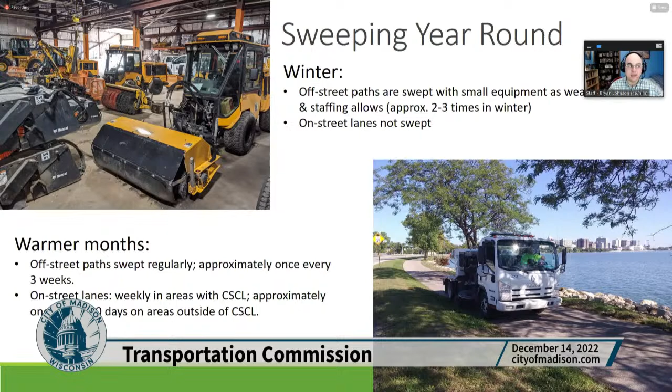During the winter months, off-street paths are swept with that small machine, but the on-street paths we are unable to sweep. The bigger street sweepers can't operate in the winter, so we don't use those. Obviously we can't use them. Plus they're also shipped out for yearly maintenance overhaul in the winter months, so we don't even really have them on hand to take care of any on-street bike lanes.

During the warmer months, the off-street paths are swept regularly, once every 3 weeks or so, with the equipment shown in the photo. The on-street lanes are swept fairly regularly as well. In the Clear Streets, Clean Lakes area, which is the downtown core isthmus area, any on-street paths there, like bike boulevards, are swept weekly. Outside of that area, every 10 days or so, give or take, depending on equipment availability, breakdowns, and things like that. But they're swept really regularly.

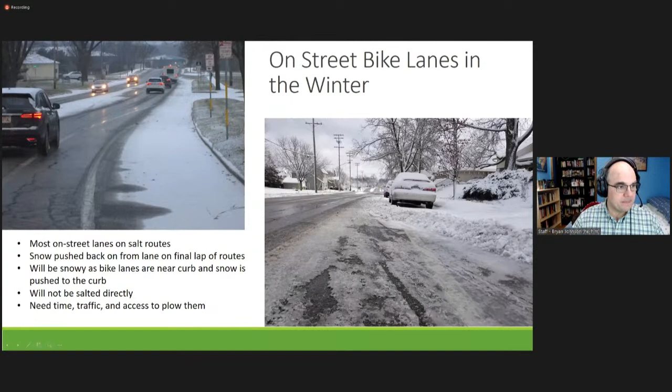The one change that did happen from last year to this year was we reimagined what's called the quadrants. Really it's a sextant because it's six pieces of the pie, where we chopped up the city, because many of the facilities—bus stops, city sidewalks, lanes—are really a shared responsibility between streets, parks, and engineering. We all take a slice of the city to do it.

Most of it was fussing with some of the boundaries to get a little faster response. But one of the bigger and more notable changes is the contraflow lane. That is now done by the Streets Division, along with the protected bike facility on Bassett Street. Streets has a standing overnight crew now, which we've had the past couple of years, and we're able to help keep those lanes open a little better as a result.

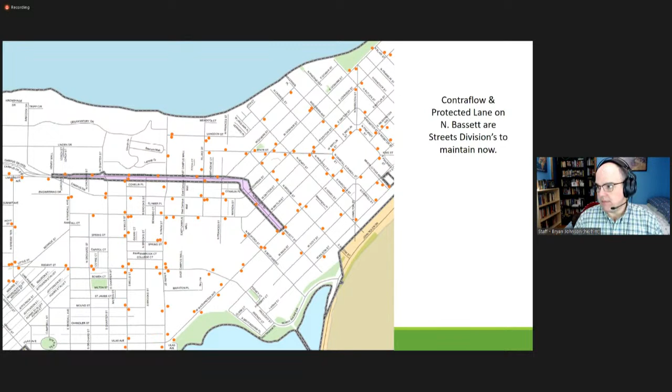So we've taken on that responsibility, even though it's in the middle of engineering's area—something Streets is still able to do. And that's really all that I had.

So Ryan and Greg, looks like you guys are up next.

Okay, that would be me. My name is Greg Genin. I'm the operations manager for the Parks Division. I'll present a couple of slides and then turn it over to Ryan to present some additional information. If you could click to the first slide.

As Bryan pointed out, some of the information on the slides remains the same. I'll highlight the things that have changed so you can differentiate, make it hopefully easy. We continue to clear the priority arterial path by 7 a.m. Monday through Friday, excluding weekends and holidays. Hopefully any biker will find that they're pretty well cleared by 7 a.m.

We will continue—again, pointing out these are things we've continued to do in the past—clearing on weekends and holidays within 12 hours after the snow stops falling. So it's a judgment call. I know some would question, has it stopped, hasn't it stopped? We'll get out there as soon as we feel it's stopped enough to clear the path without redoing it.

We continue to utilize the new toolcat that was supported for the bike path for snow clearing. That's greatly appreciated—the equipment is so important, and it allows us to do a better job with the growing requirements for the bike paths.

We also reviewed the territory responsibilities for quality and quantity efficiencies, as Bryan pointed out in his slide—that was a change this year. And we increased the use of broom clearing to allow conditions to reduce salt and sand use, which also allows us to clear a little better when we don't have deep, heavy snow. We can hit it pretty quick with the broom and get it right down to the pavement.

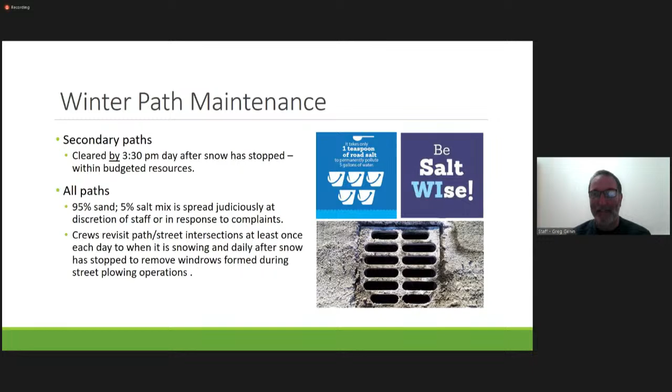And on complaints, we tried, as shown in the next part of the slide, to keep an eye on the paths. We drive the paths once each day when it's snowing, and then daily after it stops. We'll clear the windrows that are formed by the streets. But also we respond to complaints. It'd be great if we didn't have any, but sometimes that biker on the path is going to see something we haven't gotten to, and we'll respond as quickly as we can. Also, as our staff is out there, they're watching for slippery spots, black ice, and other things that can create a hazard for a biker.

And I'll turn that over to Ryan unless there's questions.

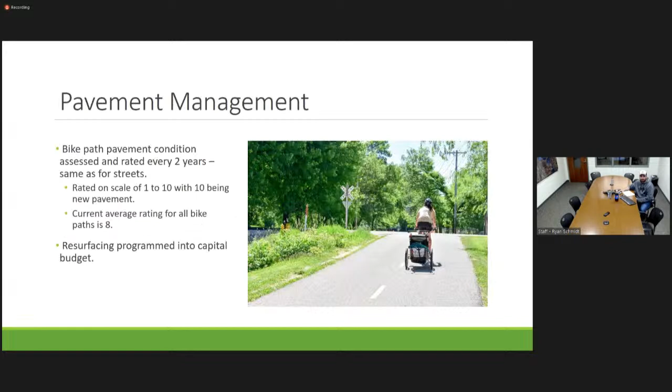Thank you. One more. Did I get ahead of you, Greg? I'm sorry, are we good? I appreciate you navigating it, Bryan.

This is a bit more of a breakdown for the last 2 years of how those reported problems came across. As you can see, for snow and ice, we are under 20 reported problems for both 2021 and 2022. So for a city of the size we're at, to have that many reported problems over 2 years, I think we're doing a pretty good job of making those facilities better for everybody.

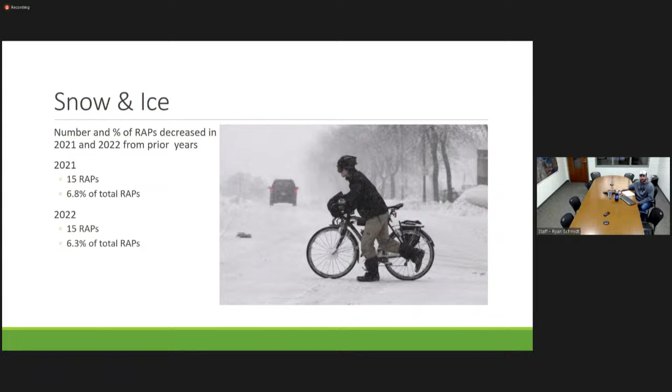The first one is about snow clearing on the trails. Obviously we do a great job in the city of clearing those paths nice and early. One thing that happens though is where the road meets the path, the plows come through after, and then you get snow buildup or ice right at the road crossing. I'm curious, is there a process for going back throughout the day on some of these paths, even though you're out there early on a lot of them?

I can take that question. Yes, we definitely have crews out. We work especially with Parks and Engineering, since we're responsible for most of the bike path snow removal, coordinating a start time so it's cohesive between departments, or as close as we can with our staff and some budgetary constraints. That staff will typically do an early start - for the storm coming tonight, we've staffed employees who will come in, hopefully timing about when the storm starts. Their main priority during the snow event is opening up the main routes, going back over as the streets, arterials, or salt routes are plowed, trying to open up those aprons.

Throughout the storm, we continue doing that. Usually when the snow starts to taper off or ends is when crews will really go back and focus on that. If streets goes to general plow, or we know there's going to be pushbacks, our crews are redispatched - I think this is probably true for parks as well. A couple days after, we're all back with crews, at least inspecting it, and in a lot of cases going through and cleaning up those windrows. In engineering we have an actual route for the windrows, so if there's a general plow called by streets, we send crews back out to address just that. Crossings and anything on the bike path that could be a conflict with traffic is obviously a high priority for us.

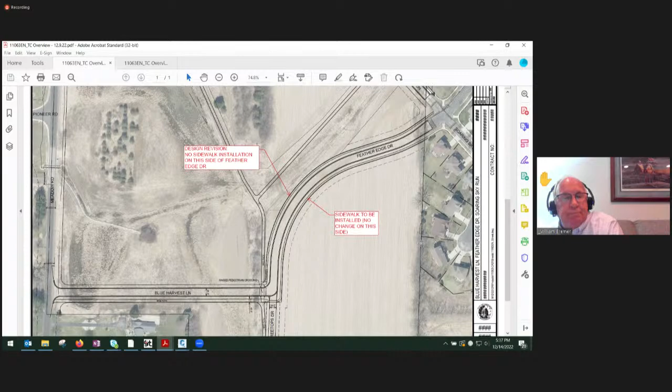Okay, thanks, Bill. Any other comments or questions? Is that all you had, Bill? And I'm going to take your hand down. Okay, anybody have any other comments or questions for Reed?

Okay, with our concern about sidewalks, we appreciate you bringing it back so that we can understand this update. And it looks like you're good to go. Perfect. So thank you for your time. You bet.

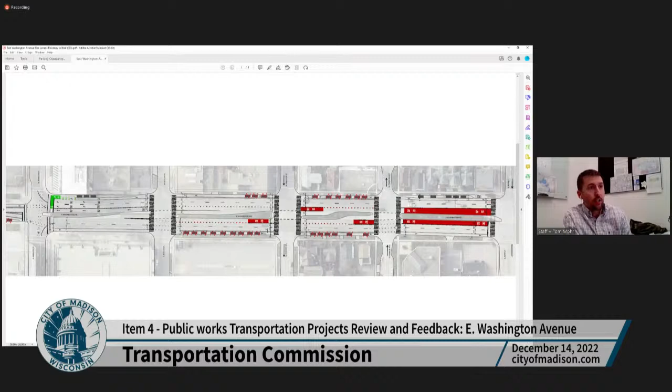This is me, Tom Mohr. Oh, hi, Tom, how are you doing? Hi, good. So yeah, this is actually a resurfacing project. The limits are up at the square, Pinckney Street, down to Franklin.

Except that for pavement markings, we're going to go, including this project, all the way down to Blair Street. It's a little bit confusing because there are different projects here and different things going on, but we're going to treat it all as one big project with this pavement marking. So this would be the ultimate, final lane configuration, which includes BRT center running between Butler and Blair, with stations between Franklin and Blair. But with our project, we would set everything up for BRT, though I think we'll get done before the red pavement markings are needed. So we'd probably install everything except the red here with this project, but this would be the ultimate. And the big difference here is that we would be proposing to remove the majority of the on-street parking and mark in on-street bike lanes.

So I can start at the square and work our way down. On this first block between Pinckney and Webster, we actually have enough street width to maintain parking on one side, so we propose to do that. The block between Webster and Butler would essentially stay the same, because this outbound side currently had, or up until a couple weeks ago had, a bus pull out, so there was no on-street parking here, and we can maintain the parking on the inbound side.

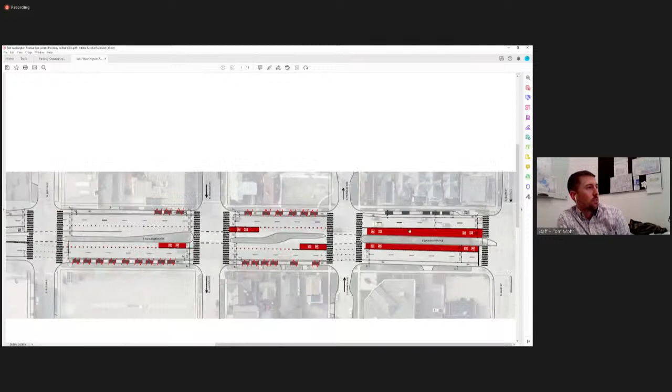And that's kind of the overview. We plan on having a public information meeting tomorrow night to discuss this, but we're looking for approval of this proposed lane configuration layout. Are you actually looking for a motion from us, Tom, just to clarify? I guess this is actually here for... It's just here for review and feedback, was my understanding. Feedback, yeah, right, okay, yep, you're right.

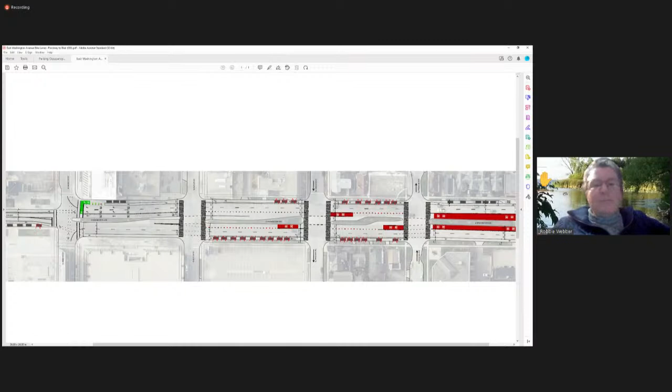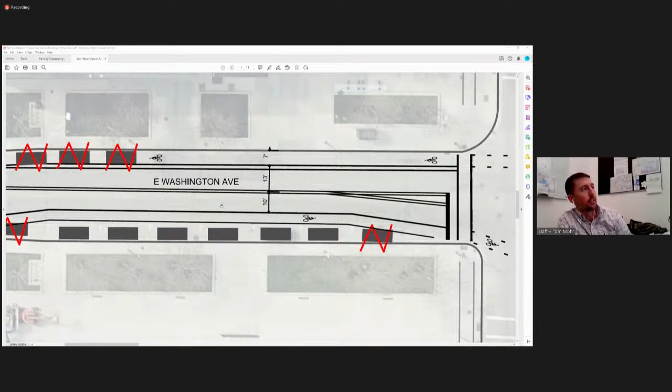So I apologize if it's in here, but I was having a little trouble reading the lane widths on some of these. Where the bike lane is next to the parking, what is the combined width of that? Let's see, so parking and bike lane... got this pulled up on another screen, let me quick check that. So here on this block, this is 15 feet, so it'd be parking and bike lane at 15 feet next to a 10-foot travel lane. And then on the inbound side, we have a 7-foot bike lane with a 2-foot buffer and an 11-foot travel lane.

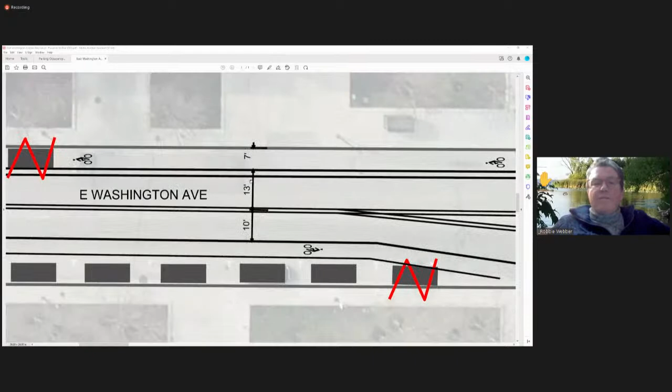13-foot travel lane, it looks like, but I think that includes the buffer. So what's the striped width of the bike lane on the south side? On the other side where there is parking, is that going to be 5 feet or 7 feet?

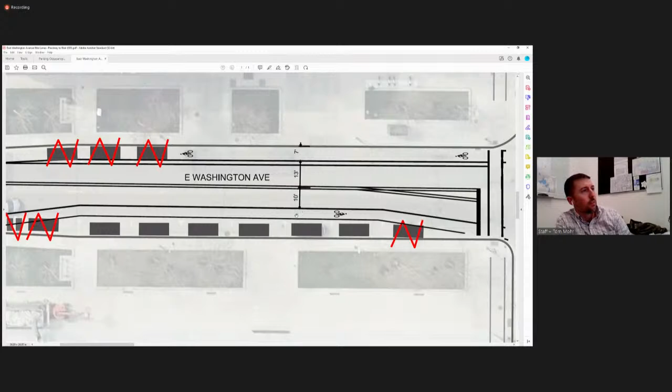I think what this is showing here is 5 feet, which puts it about a foot or two off the existing parking stalls. So we've got, I think what this is showing is 5 and 10 actually, but we could narrow that.

Yeah, I think the issue is if we can stripe the lane a little bit wider, because it'll discourage people opening their doors into the bike lane, or give people more space to avoid the door. And if you stripe the lane wider and the parking lane narrower, it encourages people to park closer to the curb and be aware that there are people bicycling. Yep, we can do that.

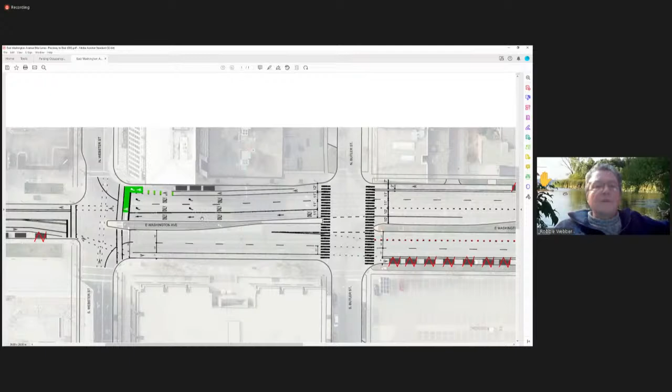Okay, great. Is that the only place where there's a lane next to parked cars? Yeah, so this location coming up to Webster is existing. We weren't planning any changes there. Okay, that's by the hotel AC, okay.

Yeah, so I think that is narrower. It's an 8-foot travel or 8-foot parking lane next to a 5-foot bike lane. Let's see the next one, this is like the narrow spot here. This is inbound, just coming beyond Blair, between Blair and Franklin. So we've got a 7-foot parking lane next to a 5-foot bike lane and a 10-foot travel lane.

So this is kind of our bare minimum. But I guess the thought here is that with the business at the corner and the residents, if we can fit parking in here, we probably should. And with the bump out, it's going to be a dead space anyway.

Okay, I mean, that's pretty close. That's really door zone territory there. So that is a concern for people coming up, and they're going to be moving pretty slow going uphill. I'm just worried that the drivers won't see them coming.

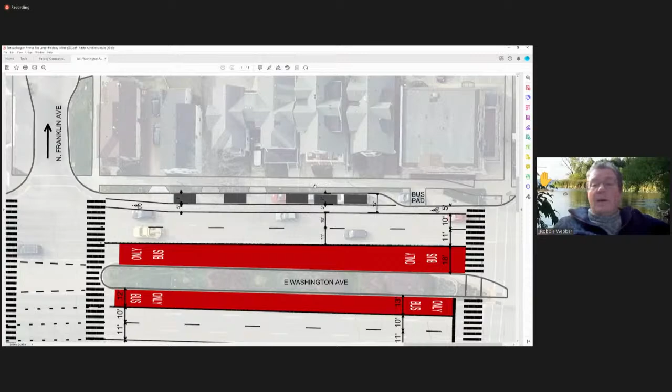Yeah, we've got some locations that have these widths. I think the argument for parking is that there aren't many spots, so it's a fairly short distance. And bicyclists are going to be moving slower since they're going up the hill. There's not a huge turnover of parking here.

That was my question, what's the business on the corner? That is Chalmers Jewelers. They do have a little lot in the back off of Blair Street, and the rest of it's all residential.

Yeah, okay, as I said, if it's low turnover, then it might be okay, but with a high turnover area, I'd be really worried about that. Yeah, these are actually 2-hour spots, I believe. They were previously metered, but they're not anymore.

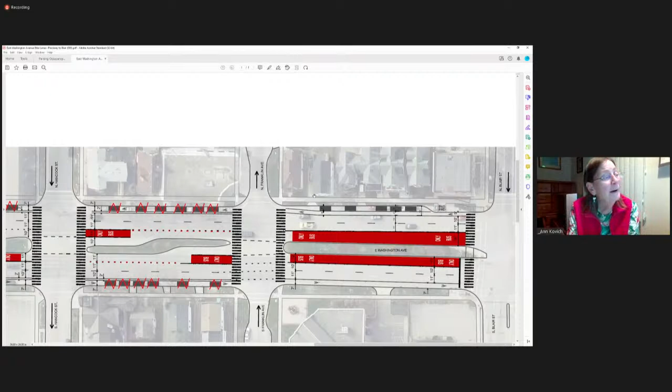All right, well, that's my feedback, but anyway, I'll take my hand down. Just a concern, I know you're taking it into account, Tom, but that is pretty narrow there, as you pointed out.

Bridget, go ahead. Yeah, thanks, Ann. So Tom, can we just go back to that same block? I just had a couple questions. So that transitional housing complex that takes up a good part of that block, what I've experienced a lot there is folks getting dropped off and picked up right out front, which is a fair amount of turnover with parking there.

And I'm just wondering, so the bus lane, it starts at 18. Just visually, it looks like it narrows down near the top. Is that correct? Yep. So there probably wouldn't be any options for...

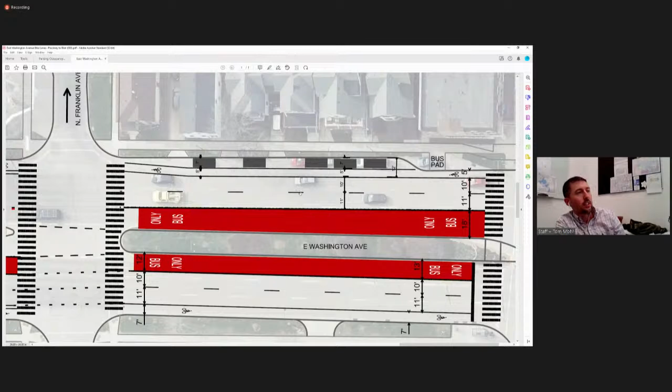Yeah, this bus lane line here is kind of set because on the opposite side of Blair Street, there's kind of a shift. So with these lane lines and lane widths, there is not much wiggle room at all.

Yeah, the bus. So the way this kind of works is that the bus lane line is kind of set in stone. That was approved with BRT, and those are the minimums for the bus to fit with the stations. And then we're not moving the curb, so we're working between the bus lane line and the curb.

Well, so the median that's there, that's not an option either? Because that's a pretty big median through there. Yeah, this median will be the BRT stations. Okay, I think they're kind of taking up the entire median. They are, okay, all right.

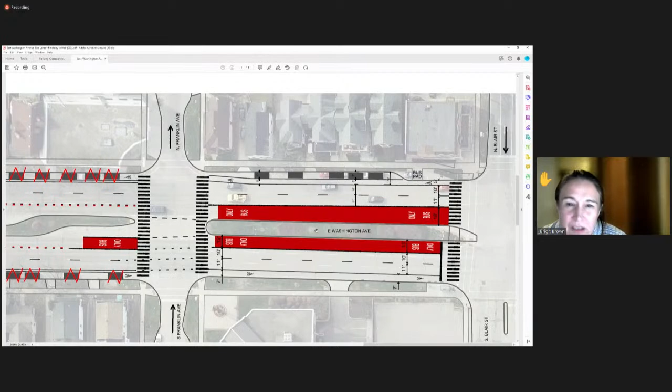Then can you go up to, what would it be, Butler? So I'm just wondering, this is a particularly difficult crossing here, especially on the south side of Butler. It's just to get across there as a pedestrian is really difficult. And when the nose of the median is kind of tight like that, it doesn't give folks necessarily a refuge as they're going across.

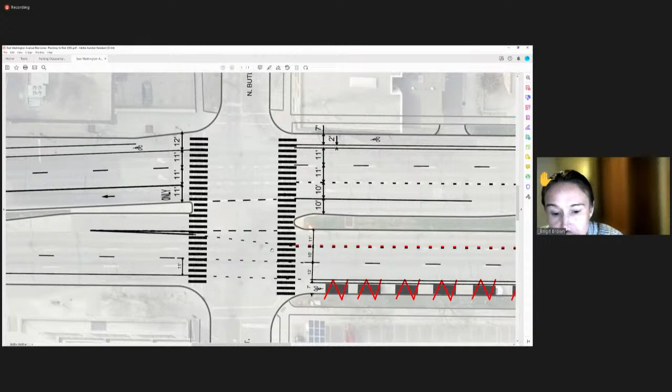I'm just wondering if there might be some options there to create a safe place for folks who can make it, because generally you can make it halfway. You can't really almost ever make it all the way. And actually it's the same thing at the bottom of the hill, right on that block that Chalmers is on, especially because of the grade of that hill, both going up and going down.

So yeah, this is all getting reworked with BRT, but this is strictly a resurfacing project, so there were no plans to change anything concrete-wise. Okay, but that's something we could keep in mind and see if there's something we could do there.

Yeah, I mean, I know we're trying to cut down on the number of accidents through here and crashes, but it's still scary when you're a pedestrian. And it doesn't look like there's anything going on here that's going to make it any easier, especially for someone who's not able to cross quickly.

Jim has his hand up. Do you have something to add, Jim? Yeah, I was just going to say with the resurfacing project, we could take a look at extending those noses. That would be a nice pedestrian improvement.

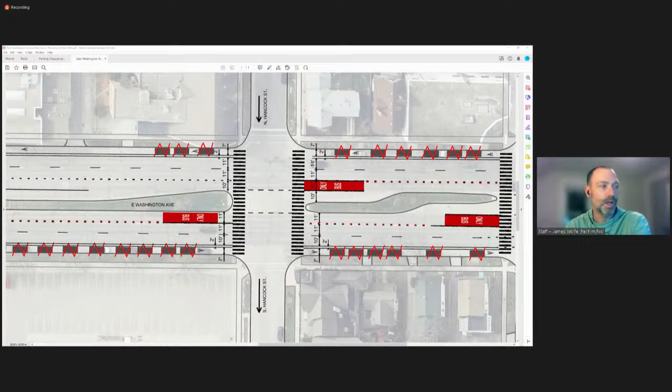That's a good suggestion. We just have to take a look, since this is primarily just asphalt work, maybe a couple of curb and gutter replacements, making sure we're not getting into additional poles and other underground infrastructure and things, but we can certainly look at doing what we can.

That'd be great. The other thing, and I know it's probably outside of the scope of this, but I just want to mention is for those same crossings that I mentioned, the distance is so great, and for whatever reason the noise through there can be really intense, and so it can be hard to hear some of the crossing signals. I don't know if that could be taken into consideration as well for folks who really rely on those.

I don't know, especially if there are vehicles coming one way that can't see the crossing signals that are closest to them, but have to look at the ones that are far away. I don't know if there are ever options for larger signals, but I've seen them in some big cities, and this is just such a busy and loud corridor that anything we could do, I think would be appreciated and would be useful and would help cut down on the number of issues that we have with pedestrians in the corridor here.

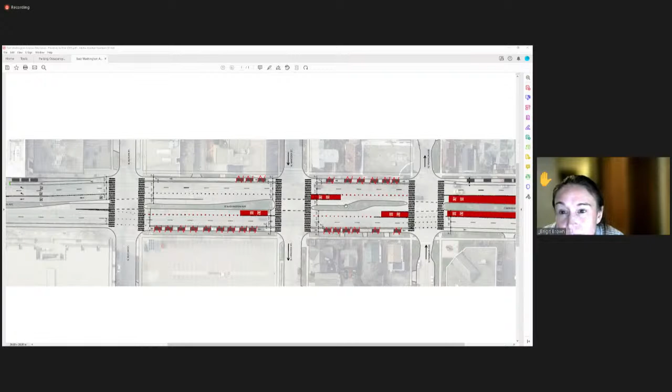Yeah, we'll have to think about that because with this area, next year is going to be a continuation of that Blair Street project, which includes the Blair East Wash intersection. And then we've got the reworking with the BRT. And then we have this project, which was planned to be resurfacing. So we'll see if we can fit some of those changes in somewhere, because I think the stuff down here is definitely going to be torn up for a big chunk of next year.

Okay, and then you said that you won't color the bus lanes yet, so those will just be used as regular motor vehicle lanes until then? Yep, basically. So with the BRT main contract, they will install the red pavement marking and signing probably right towards the end of the project when BRT is ready to go.

Okay, and then my last question, you had mentioned. Bridget, hang on a second, Bridget. It looks like Jerry has his hand up, so he may have some feedback for one of your other questions. So is that right, Jerry?

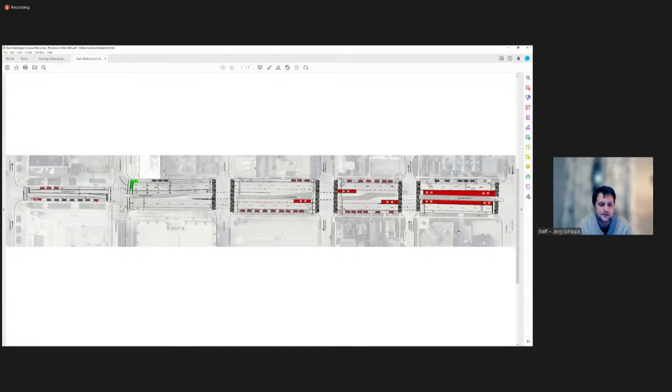Does that help, Bridget? Yeah, sorry, just one last question. No, go ahead.

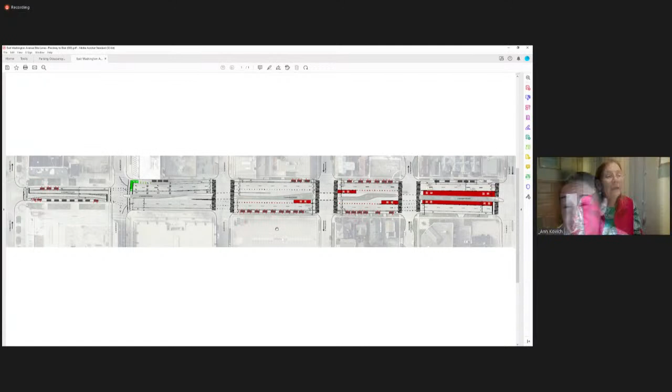Thanks, that's all. Okay, yeah, no problem. You can ask as many questions as you want, Bridget. No problem. Other comments or questions?

East Washington gets a lot of attention, Tom, so it's always good to hear about improvements on East Washington Avenue. Anybody have any other comments? A lot of good feedback for you, Tom. And thanks to Jim and Jerry for their feedback as well. Did you have anything else, Tom, or is that good? Nope, you're good, I'm good.

Okay, great. Let's move on to item 5, which is West Wilson Street. And who's doing that this evening?

I'll be doing this one. Oh, hey, Jim. This is a project that I'm still holding on to. Okay, I'll share screen - it's going to get a little weird for a sec, so sorry about that. And congratulations, by the way. Oh, thank you very much.

This first page is just a refresher. A little over 2 years ago, we had a project approved on West Wilson Street and South Broome Street. On Broome Street from John Nolen Drive up to West Main Street with some improvements, and on West Wilson Street, the reconstruction is from Broome Street to the Henry Hamilton intersection. We also had a corridor report on West Wilson Street that went all the way from Bassett down to Blair, and a corridor plan on South Bassett Street that we've been implementing, namely to install a parking protected bike lane.

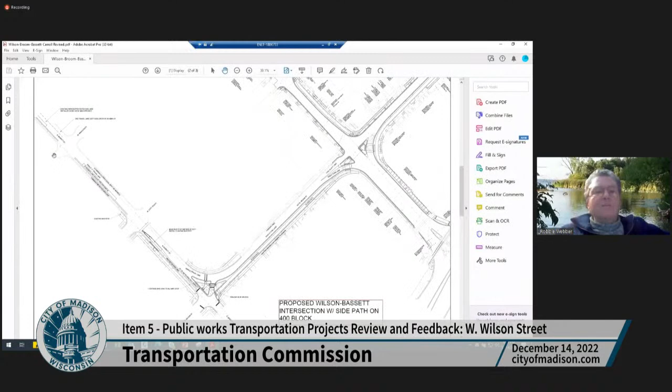Jim, can you make your screen full? Oh sure. Screen makes it a little easier to read. Thank you. Yeah, let's see, full screen. There we go.

So zoomed in, with markings and those delineators or bollards, we would be setting up the remainder of the South Bassett corridor plan, starting at West Main Street. South Bassett is one way heading to the south.

This lane would drop at West Main Street, so vehicles would either have to turn left onto Main Street or merge over, similar to other locations in the city, where that lane ultimately becomes a parking lane on that side of the street. It wouldn't be a marked parking lane, but parking could be allowed here. Then we'd have a single travel lane from West Main Street continuing up to the intersection with Wilson.

We'd continue the parking protected bike lane along South Bassett Street to the intersection of Bassett and Wilson. This would involve relocating the existing bus stop, near side at Bassett and Doty, to far side at Bassett and Doty, and constructing another floating bus stop there with a bus boarding island. The parking protected bike lane would continue along the curbside between the boarding island and the curb.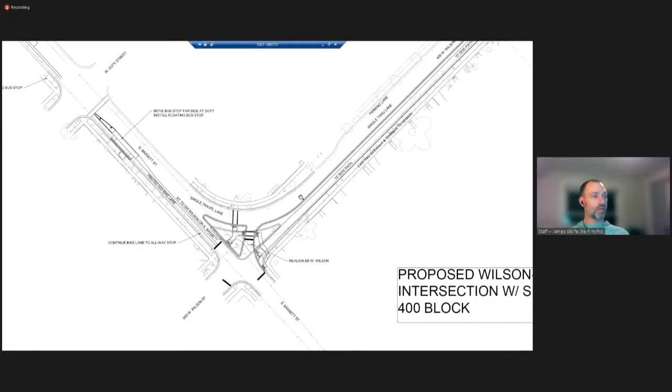The difference here from the original corridor plan is that we originally showed merging traffic turning right onto Wilson Street or continuing to the dead end of Bassett across the bike lane, which would continue around the curve and merge into a marked bike lane cycle track on West Wilson Street. One driver here is recognizing that instead of having this conflict point with moving vehicles and merge point, we could continue to this all-way stop, knowing people will likely want to continue down Bassett Street too, since Wilson Street won't be the only bike facility in the area.

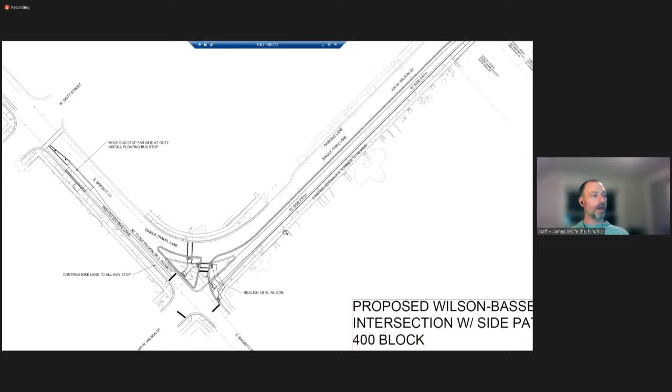The other change we're proposing is moving the curb out on the 400 block of West Wilson Street, making this a sidewalk-level off-street cycle track side path, similar to what we're doing on the 300 block of Wilson Street. The original plan was just marking a buffer on the street using delineators and bollards, keeping it on-street. We're bringing it off-street at this intersection because we're reconfiguring it and want to make sure vehicles aren't tempted to continue up that street's current yield lane.

So the big changes here: side path, moving the curb out. This also works out better for some of the maintenance responsibilities that we have out here. One issue we're having with the parking protected bike lane on Bassett is garbage carts—the carts have to be placed in that buffer space. By doing these side paths, that creates a more traditional terrace where people recognize they need to put their cart to the curb, and it creates a bit more space than what we have in the buffer on Bassett Street.

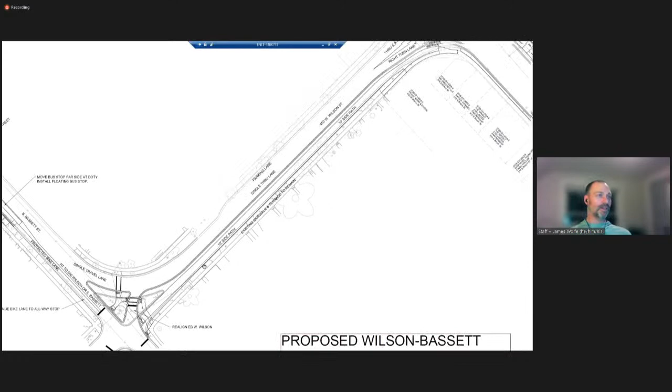I think I've said everything about this piece. But this side path will continue up to the approved design for the Broome and Wilson intersection, with the raised crossing coming into the channelized right turn lane. The single lane coming up Wilson Street will become two lanes near the intersection since it's a smaller movement. What's currently a pretty wide lane is getting narrowed up a bit to be a through and left, instead of almost a separate through and separate left lane like it is now. And then there's this right turn lane onto Broome Street.

So I'll go to the next page—this is on the other end of the project. I'll start at the intersection of Wilson and Hamilton.

We also have an ongoing watershed study in this area, because there are some ongoing flooding issues we're trying to address as part of this project too. As part of that watershed study, one of the recommendations was actually building a raised bike pedestrian crossing across this Henry Hamilton intersection. We've got water screaming down Hamilton Street by the courthouse that we're trying to divert back towards Broome Street, and we're going to have some upsized pipes along Wilson and Broome to collect that water.

So this was kind of a win-win here—we can build a better bike pedestrian crossing. It's a pretty long crossing too, a little bit confusing. One thing I'm not showing here, as part of a separate development project, we are reconfiguring Henry Street a little bit where it tees in here. Since that's being done separate from this project, I wasn't showing it on this plan, unfortunately.

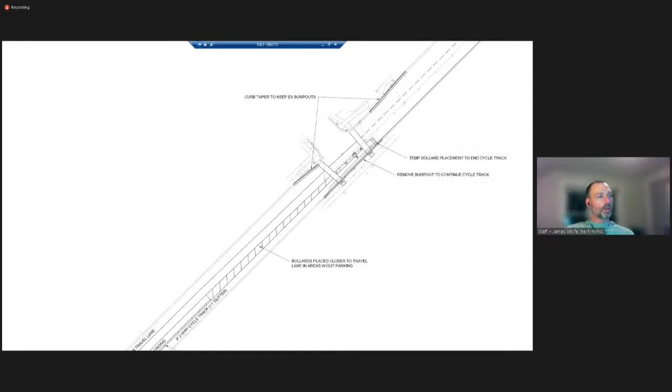And then getting up to Carroll Street to continue the cycle track through, this bump out on the side of the street gets removed. We build the curb through, but with how some of the lane transitions are working out, we can do a little curb work on the other side of the street, but keep these bump outs on that side, which helps keep pedestrian crossings a little shorter. I also think they're necessary to keep ADA compliant curb ramps here, just with the grades coming down Carroll Street.

It gets a little awkward, but on an interim basis, we'd end the cycle track here at Carroll Street. We'd maybe give a little additional space beyond the crosswalk for a bike to stage if they wanted to cross and go up Carroll Street. This would continue being parking by the DOA building on an interim basis.

Timing wise, this pavement marking and curb work would probably happen in the later part of the Wilson Broome project, so we're looking at fall 2023. Then we'd be starting work on the remainder of East Wilson Street in spring of 2024.

So this is going to be a pretty short-lived interim bike facility that ends abruptly here at Carroll Street. This seemed better than ending it at Hamilton, though, with a little bit of clear direction of where you can go.

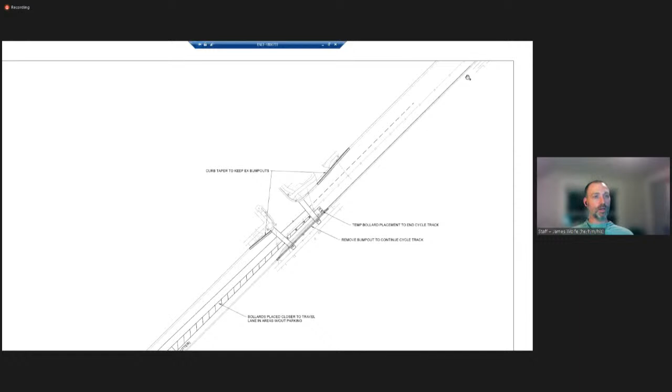The other piece of this is to really continue this up to MLK. We explored that because ideally we could get it up to MLK on an interim basis—the grades work out better there, and it's a more obvious termination point for connections to the Capitol. But we really have to reconstruct that whole intersection to make that work with some of the lane transitions and grades. So we felt that was a better fit as part of that 2024 project on East Wilson Street.

So thank you all for bearing with me on my long-winded explanation of how we ended up here. But I think that's all I have to present.

I'll keep this up with my screen share just so we can float around to some of these spots if there are any questions. Sure, that was a lot you covered, so I bet there might be questions. Bridget, go ahead.

Yeah, thanks, Ann. So Jim, I guess I'll start where your screen is right now. I'm still kind of concerned about that two-way cycle track through there and the incredibly constrained situation, and the fact that folks will be going uphill, with the speed differential.

But aside from that, with the Paisans redevelopment there, just knowing what's been going on all summer, including weekends, on the construction taking place right at the corner there—is it Morton that's doing the building there—and how that has incredibly negatively affected the bikeability and pedestrian friendliness of that area. I'm just concerned that the reconstruction at the Paisans building is going to impact, particularly if there are bollards placed in there, anything—that it's just going to obliterate it, frankly.

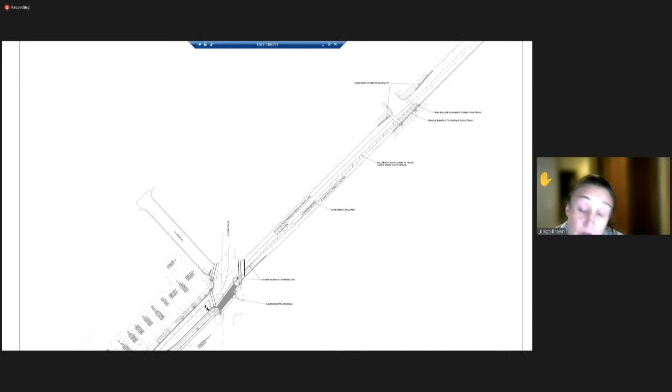I really like the raised crossing there, I think that's going to be super helpful. Going down to one travel lane for most of the time coming off of West Wilson, I think that's going to be helpful too, because there's so much confusion there constantly. Really forcing everyone into one lane should minimize that. So I'm optimistic there.

Can you head west, please? Apologies for the quick zoom out. There we go, okay, actually right there, where your cursor hand is. So that crossing, I've always had a feeling about it and I've been watching it lately really closely. There's slightly weird geometry on that radius of that turn.

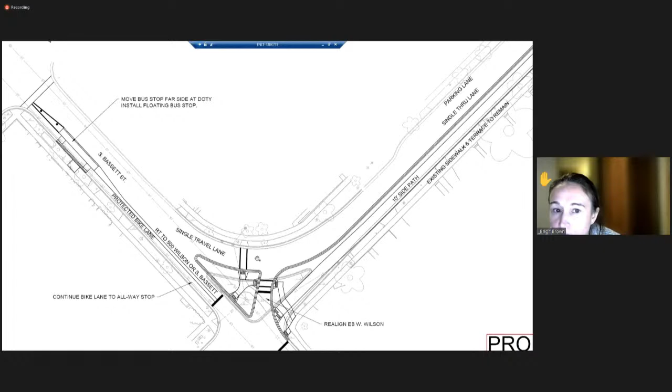Right now you have the crossing right where it is, and it's very difficult for pedestrians to be seen there. Cars are going pretty fast anyway, and even when they do stop, I can see people tap their brakes after they've made it through and past pedestrians waiting, particularly on the north side. I'm wondering, is it possible to move that crossing further west for better visibility to oncoming traffic on South Bassett? I think we run out of space on this island, and with the storm sewer here, we don't have a spot to put a ramp along with the tree conflict. All our good options run into other conflicts too, and we didn't want to move it east because that makes the visibility problem worse.

Okay, we can take a look and see if we can squeeze it in between these two inlets. I think even that would be a lot better, I'll give it a shot. It doesn't hurt to try.

Okay, and then last thing, can you keep going further west, north there? So that little bus stop curb that's going to be right near Doty, the intersection of Doty—do you know if the geometry of that is going to be similar to the one closer, the new one off of West Wash? Similar, yes, but with a little bit better options here.

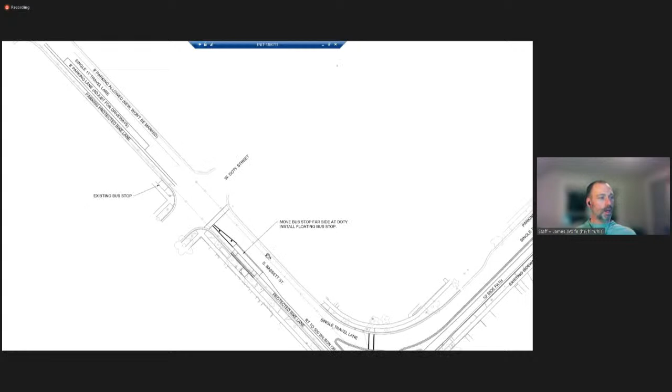One thing I should also mention: we're planning to allow parking along here too, which hopefully will prevent vehicles from trying to pass a bus and merge back into the single through lane in front of the bus. Because we aren't trying to squeeze two travel lanes here, we'll have a little more space to work with on this boarding island, and grade-wise it's not nearly as complicated—we don't have the driveway immediately here. There's a pretty good amount of Bassett Street draining towards West Wash in that area, so we had concerns about creating flooding problems there too, which we had to factor in and lay things out in a less ideal fashion.

So if there are particular things you have in mind about that bus boarding island that you wanted to point out—honestly, the only thing I'd say is that the island as you come off of West Wash, the geometry of it is, to me, perfect.

It's the smoothest right turn. The way it's placed, every time I use it I just want to thank whoever made it, because it's a pleasure. It's a little bit more difficult if I'm biking, but when I'm driving it's great. That geometry coming off of West Wash is great, and if you can transition it like that, whatever it is about that radius of the median, it's just excellent.

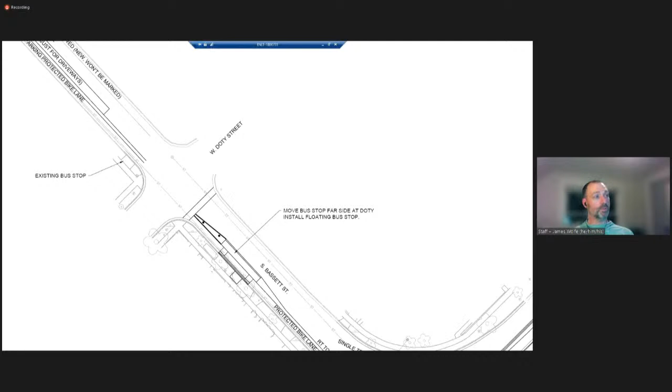Well, thanks. We're also going to have another one with this project on Broom Street by Doty too. So, to know. Okay, yeah, actually. Okay, yep, so that's it.

Thanks, that Bassett and West Wash was my first crack at a bus boarding island, a floating bus stop, so I'm glad it turned out pretty decent.

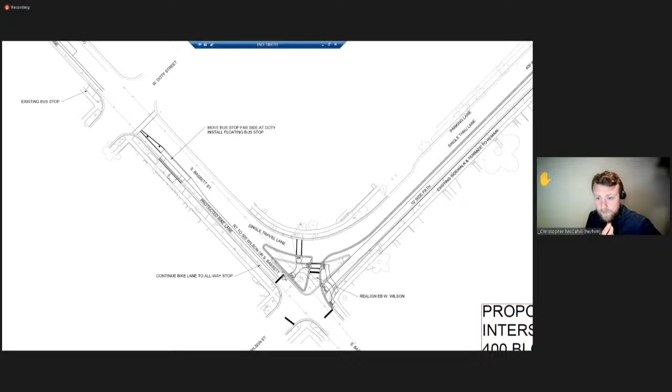I wanted to look at that Bassett and Wilson intersection you're at right here. I don't remember the old bike lane configuration, but it sounds like this is much better. I'm just wondering about where the bike lane and traffic come to that stop there, next to each other. I'm imagining a lot of drivers are going to be going straight or right, and a lot of cyclists are probably going to be turning left. It's a minor issue, but I'm wondering if there's a way to get a turn lane for the cyclists, or something like a bike box at a signal. I don't know if you can have different stop lines for the bikes as opposed to the traffic, or anything that would smooth that weaving a little bit. I think the fact that they're stopped makes this much better, but it's just something I'm wondering about.

We'll think about that, we'll see what we can do. That's a good suggestion, it is kind of a unique scenario so I'll make a note of that. We'll brainstorm and see what we can come up with. Otherwise, yeah, looks great. Thanks. Thank you.

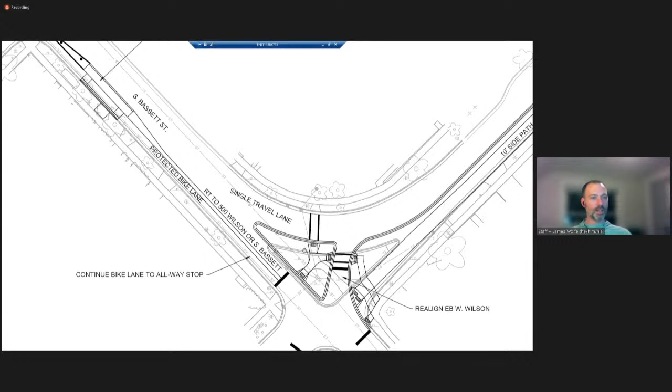Sure, we can take a look at that. Maybe I'm showing kind of a standard crosswalk. Maybe we could do a continental crosswalk here for a little bit better visibility, and we have a sign showing up here, I'm not sure what that sign is, if it's an advanced warning pedestrian crossing sign, but we could take a look at doing something like that too. I do think reducing this down to a single lane and tightening this up should hopefully help slow things down a little bit and make it less treacherous for crossing, at least be able to cross a little bit quicker. But we can certainly take a look at improving the warning and visibility of that too.

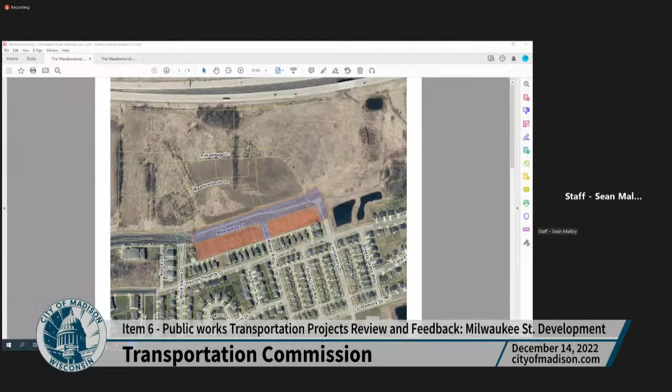So this is a project that I brought earlier this year. This is an extension of Milwaukee Street that is brought on by the development of these lots, the alley-loaded lots. The project limits are from Windstone to Juneberry. It's just an extension of Milwaukee Street.

Previously, we had some interesting geometry - we were only building half the street, having traffic move over, only building the south side. We talked with the development team, and they actually own the property on both sides of the street, so we came back with a new revision that builds Milwaukee Street on both sides, which I think is good for everyone. They're just going to do it all now.

We decided to build the outside curb and have a larger median, because we don't need 2 lanes on Milwaukee Street at this time. So we're going to keep it 1 lane each direction at this point. We're transitioning on that. This looks a little wacky, but that's how we got to transition from 1 lane to 2, to where there's 2 lanes and a left turn. It's an interesting transition, but that's what we have to do.

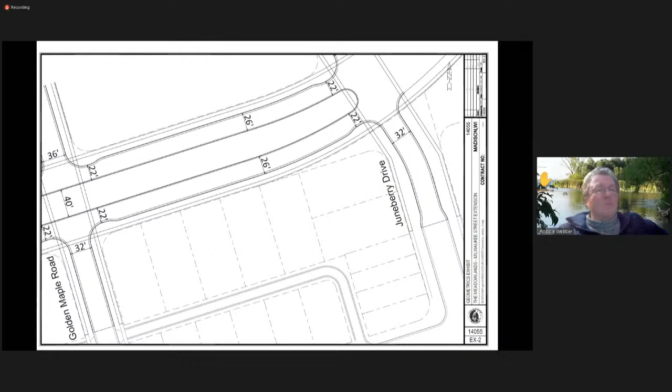Thank you for explaining the allocation of that 26 feet, because when you said it was 1 lane in each direction, I was thinking, why do we need 26 feet for 1 lane? What is the land use plan for this area, and do you really need parking? Because otherwise it's just a gigantic road that people are not going to drive slowly on. So I'm just wondering what the land use is.

Yeah, that's a great question. This map's probably the best one to go to. On the south side, we're talking these alley-loaded, pretty narrow lots. From Veridian's perspective, they told us that they need parking the most, so that's what's going on the south side. On the north side, we're expecting a little more commercial employment uses - uses that would also demand some parking when they get built out. This whole area is meant to be a town center area, and I think it still is. It's just with the uncertainty of the interchange, it hasn't really taken off. So that was the idea there.

Won't all of those uses, given how far out it is, probably have substantial off-street parking? The employment areas, the retail areas, are probably going to have a lot of off-street parking. And I don't know, you said the lots on the south side are narrow, but I'm assuming you mean they're single-family homes or multiple - are they townhomes, are they apartments? Because usually they build a lot of off-street parking, and then the on-street parking isn't used, and people just see it as a gigantic wide road and they speed up, defeating the idea of having it be slow.

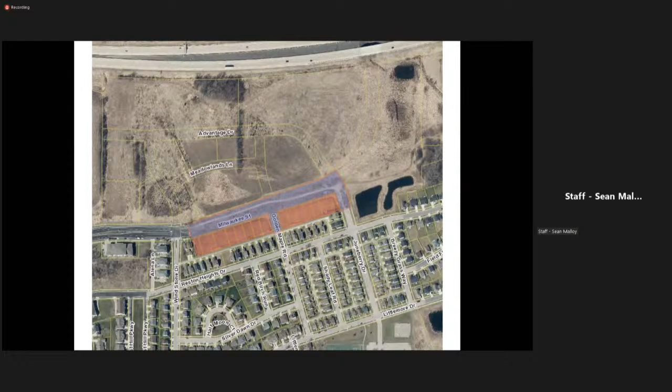Other comments on that, Sean, in response? No, I guess we can go back and talk with the developer, and I can talk with the engineer and see if there's any ability for us to do that, and we can update the exhibit as necessary before it goes to Public Works.

You took your hand down, so I assume that's all you have, Robbie? Yep, I'm just giving my feedback. We're not passing this necessarily, so I'm just giving feedback for future consideration. Yeah, we've heard that same feedback, and I've seen that on streets in my neighborhood too. When there's places for parking and nobody's parked there, the cars go really fast.

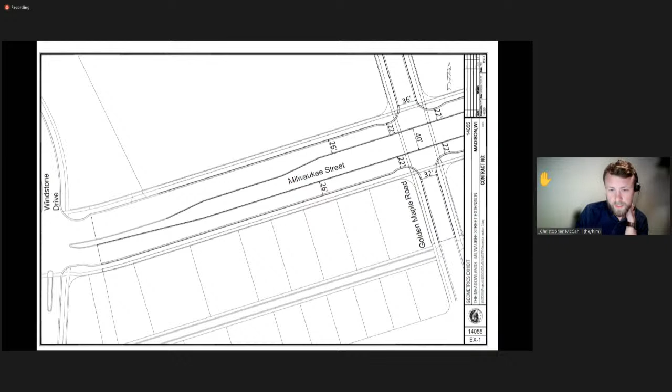Chris, go ahead. Thanks. The only other thing I was wondering is you talked about having the median go through where Golden Maple Road intersects. That seems fine to me. I'm just wondering if it wouldn't make sense to let bikes go through there, so think of it more as a diverter than a solid median. Especially since there's bike lanes in either direction here, someone might want to make a left off of Golden Maple Road.

Yeah, we can look at doing something like that, or at least widening the sidewalk in between. Yeah, that's something we can add in, accommodate that somehow. Okay, other comments or questions for Sean?

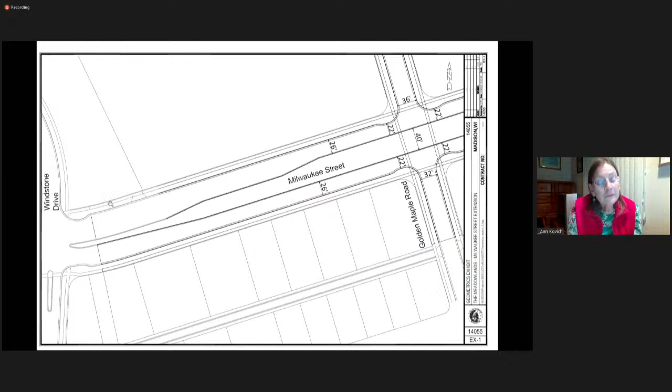I just want to reiterate what Robbie said, because I see it in my neighborhood all the time. Lots of streets, particularly Moreland Road, where there's places for cars to park on both sides, and typically nobody's parked there. It's a huge, wide open street, and cars just blast down it because it looks really wide and open for them to drive. It's a theme we've been seeing, but we also understand that development isn't finalized yet, Sean, so we understand that potential need.

Darren, go ahead. Yeah, to that point, I was looking at the map view and satellite view, and those houses look like they load up from the alley to a garage, so there's garage parking behind there. They have off-street parking with the facility. Okay, so you're hearing a lot of feedback around that one point, Sean. Maybe go back and see what the developer has to say. Yeah, I can do that.

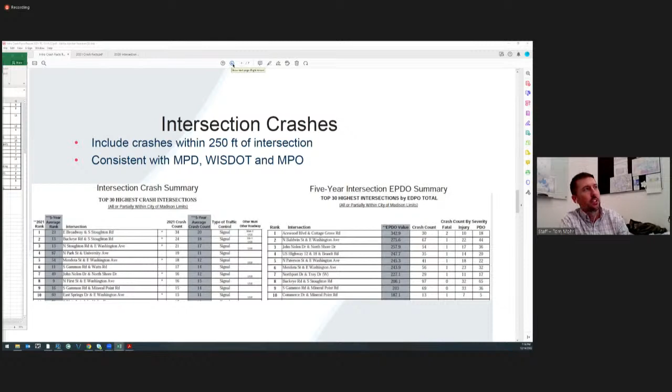There's also crash rate, but that tends to really skew based off of low volume streets. Crash rate is usually the number of crashes per million vehicles entering the intersection, and that's really not an indicator that's used. We do have that in there, but we're more looking at the EPDO.

So we do post this on the city webpage. This will be posted under our reports and studies following tonight.

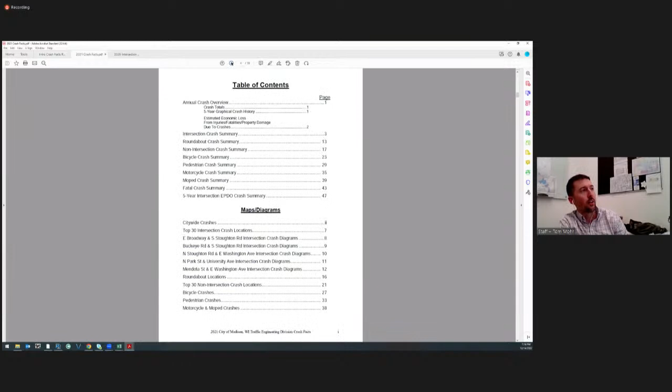Robbie, go ahead with your question. So this is sort of a process question: do you count self-reported crashes in this, or only ones where the police wrote the report?

I'm not sure, but I think as long as it meets the requirements, it's included - I don't think the police have to write the report themselves, as long as it meets the reportable crash requirements. That's the state definition for a report that has to be written up on an MV 4000, I think it's called, and the police are supposed to fill that out themselves.

But just in the last 10 days, I've had 2 people complain to me that the police refused to come out to a crash site where a bicyclist was hit. I said, were you injured? And they said, well, I was scraped up. I said, that is a reportable injury and the police are supposed to write it up. And they said, well, the police refused to come out and told them to just do a self-report. But it's not worth it for me - if they're not going to come out and record it, why should I bother to fill it out, because they're not going to do anything. In one case, the guy wanted the other driver ticketed for failure to yield. The other was actually a fairly serious crash, and the police refused to come out.

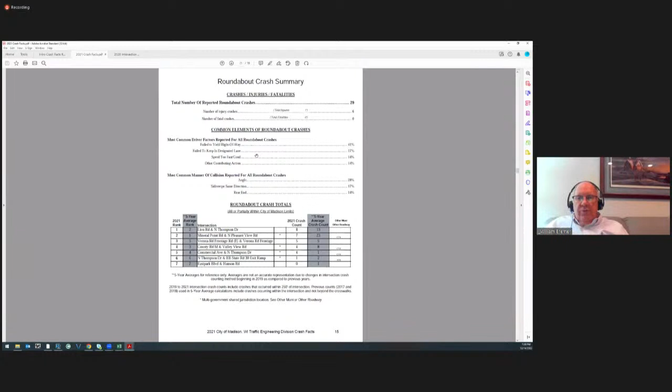I sure can. Yang has hit it on the head - it has to be in the state database, which only uses what's received from law enforcement agencies. So our concern, Robbie, is we need to get to our city police to make sure that, as far as I'm concerned, if somebody is scraped up, that's a reportable crash that should be investigated, or at least reported by the officers. Maybe they were using the excuse that it was last Friday when they were having lots of fender benders and so forth, but that would be the only reason. They could use it as an excuse why they couldn't come out, but I think they should come out in those situations you've referenced.

So apparently, according to the conversation with the police department, the guy called 911 and the 911 operator said she wasn't going to forward it to the police department because they don't come out for minor crashes.

Oh, that's not right. There's something wrong. Maybe that 911 operator may have been given direction that a certain event was going on. In other words, either a bad snowstorm, lots of crashes, lots of fender benders. And the police department may give the 911 operator conditions and say, okay, we're under a condition now where we cannot get to anything. There's got to be blood on the street before they'll go out into those conditions. But that should be a rare occurrence.

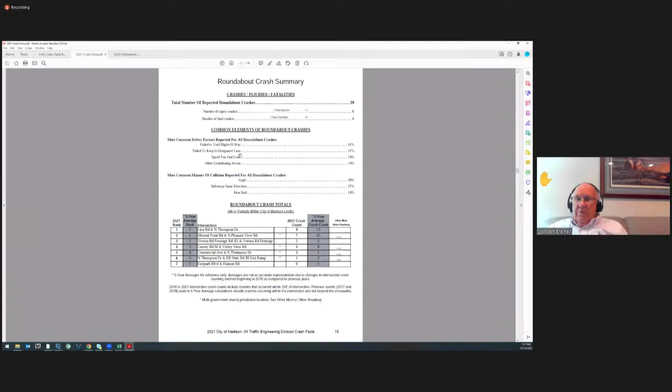Okay. All good information to have. It did sound like people were injured, Robbie, in your instances, right? Yeah, there were. Well, one of them, he said it was pretty minor, and he said, I tried to call the police, I tried to get them to come out and do a report, and they refused to come out. The driver was very apologetic. And he said, my injuries were not bad, but the other person had a bad crash, and she actually went to the hospital later. There was no report.

And that's also fairly common, especially if you're not in a car. You often don't feel your injuries until the adrenaline wears off, at which point you and the driver may have left the scene, and you end up going to the emergency room or urgent care with an injury, and it's no longer a reportable crash.

And that's what happened in the second case. She tried to call, and the police said, are you injured? And she said, I'm not sure. And they said, well, we're not going to come out if you're not hurt. And she just didn't have the force, I guess, to say, you need to come out. And the driver left, she left, and then she ended up in urgent care.

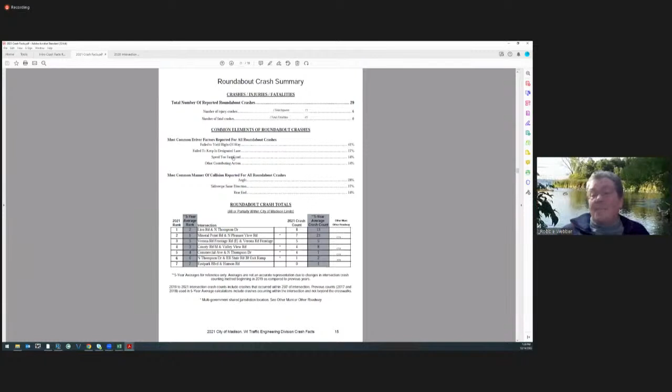Well, it sounds like a hole in what we would like to be collecting. And maybe we can figure out a way to address it. Clearly not going to get in the actual report because of everything everybody said.

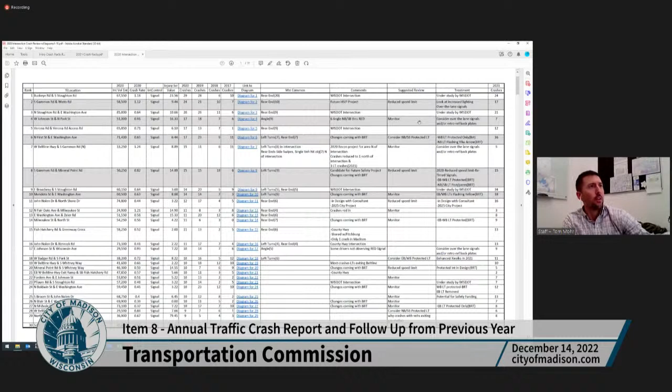One of the top ones here, I think that's Johnson and Park Street. So that's where there's a lot of right turns from West Johnson to southbound Park. It was ranked number 4 in 2020 and then number 7 this year. So that's one where we could consider doing something with the signals.

And quite a few of these are looking at separating out left turns because left turns are often high crash frequency.

Some of these already have projects planned. Stoughton Road, WisDOT is looking into reconstructing Stoughton Road. Gammon and Watts, we've got a highway safety improvement program for that one, which just happened to be number 2 in 2020.

Beltline and Gammon - in 2020 there was the reconstruction of Gammon Road, so it looked like these crashes occurred during the reconstruction. It went from 15 crashes in 2020 down to 5 in 2021.

But I think you can look at this in more detail, and if you have any suggestions or comments or want more data on any of these, we can provide that. We've got the diagrams for each one of these intersections.

I think those of you who are here tonight know I'm Renee Callaway. I'm the pedestrian bicycle administrator in traffic engineering, and I have been managing this project, but we have had an intradepartmental team working on this. There have been a lot of different people involved helping put this together, but they gave me the joy of doing the committees.

You guys are super familiar with why we might be working on this guide. We have policies, practices, some ordinance. We've had a complete streets resolution for a long time. We're kind of known among US cities for being pedestrian and bicycle oriented, but we still have gone to bigger streets over time, with more space for people driving, for storing cars, and got away from the older streets that we're all familiar with in the older parts of the city.

This brings up some concerns. We have these wide streets, as you were just talking about tonight. They end up not having high parking utilization, people drive faster, you've certainly heard that a million times. And then the next thing you know, these streets are on our Safe Streets Madison list, and they might even be relatively new streets. I'm always surprised, I'll get the name of a street with a request and I'll look, and sometimes on Google Street View it's not even really built out completely yet.

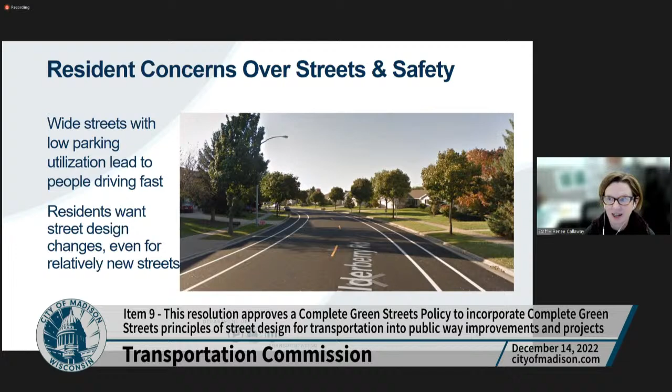That's what we're trying to change, right? As a committee, we've been trying to turn that upside down and build streets right the first time. Many of you are familiar with Complete Streets. We're trying to build streets that allow people, everyone, no matter how they're choosing to travel, to do that. There's not one design. They don't all look the same. They take into consideration the context, the differing priorities of streets. But we know that they are focused on safety, comfortable places to be, and that they allow access for everyone.

And then we've brought in the green streets because we know that's such an important thing for sustainability, for ultimately the resilience of our city. Those need to be thought about every time we're looking at a street, so that brings that into the mix more officially.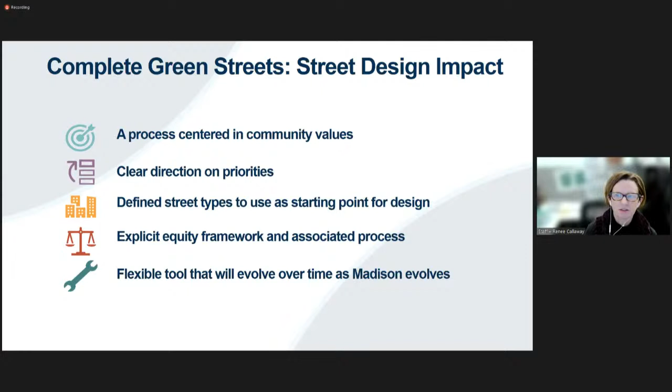I think this last point is very important, particularly for this committee: this isn't static. A guide like this isn't a one-time and done. It's something that will need to change and evolve as the city evolves, as design guidance evolves, and as knowledge and ideas around green infrastructure evolve.

So we've talked here, I won't go into it too much, but this idea that streets are for humans, that they should be the right size, and that we really need the sustainability part of green infrastructure.

The TPPB has been working on this for quite a while. They've been the lead committee. We've been at this for a couple of years, working on different parts of it. So we're at a point where we feel this is a product we can move forward with, and then continue to refine from that starting point.

So I just wanted to talk briefly about the engagement. We did three phases: first, just learning what people valued, reflecting back to see if we understood what they told us and that we were on the right track. Then once we built out the guide, testing that with people.

We did a lot of things that are pretty typical since the pandemic. We had a virtual open house and a virtual webinar. Both were recorded, so people who weren't there could watch them. We also did a lot of online surveying, mostly open to the general public.

We did have one survey focused particularly on people with disabilities. And then we put our primary effort into a series of focus groups through each phase to talk specifically with people of color and low-income residents who weren't coming to our virtual meetings or taking our online surveys, which is pretty typical with planning efforts like this. We worked with Equity by Design and Annette Miller, who has great contacts in the community and does this work for us. She really ensured we were getting those voices heard and reflecting that in our work. So that's where we put that extra effort.

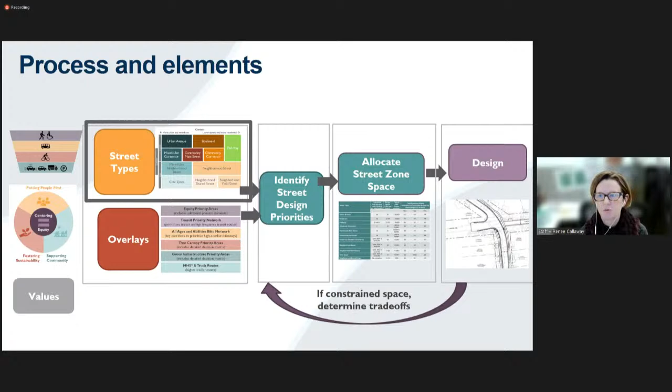This is how it all fits together. The modal hierarchy and the values are infused throughout the whole thing, so when you get to the end, you should still feel that's a right fit for those values in that hierarchy. We have a process with these street types, these overlays, which also help with street priority setting, these charts dealing with space allocation, and then ultimately getting to, after going back to priorities if needed to make trade-offs, this idea that you'd arrive at a design. There isn't necessarily just one design that might do those things—there could be more than one—but that's the process you'd follow to get to that final design element.

So I'll just go through this a little bit more.

Some of you have seen this chart. There are 11 street types that they are focused on more in the context of the street—what is that street like, or what do we want that street to be like? As I say here, this isn't what the street looks like now. These are aspirational. Over time, we'll have tons more examples of what these look like, but this is what we want a given street to look like, and these serve as a starting point for that design process.

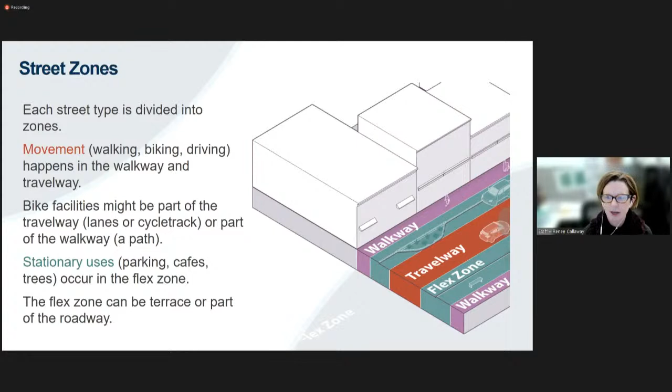Each of those street types is broken up into 3 zones. The travelway is more of the traditional movement—it's transit, it's generally where biking happens, and it's where motor vehicle driving would happen. We have the flex zone, which is more stationary uses: trees, green infrastructure, parking, transit stops, bike parking, street cafes—those stationary things are part of that flex zone. It incorporates both sides of the curb if parking is included. And then there's the walkway, where pedestrians use that space. It also could be a shared use path, so sometimes biking might happen in the walkway.

So each of those 11 street types is like this urban avenue example, where you're going to have a pretty basic graphic. We didn't have enough money to build out the fanciest graphics in the country, but we have pretty good ones that give a good feel for what this street would look like. They're color coded to fit with what those zones are. Each of those zones is going to have a priority to help with that design start—it's not as simple as low, medium, and high for everyone. As you can see in this example, sometimes there's going to be two that are high, adding some challenge to that design work.

There's also a brief description that goes with each one and with each of those priorities. And then what we have is just a starting point, an initial map that maps these out. It doesn't map every single neighborhood yield street or every neighborhood street, but your collectors and above we've generally mapped—these are a starting point. You might see a project come in and maybe it's recommended to be a different street type. The planning department will also use this quite heavily in their sub area plans. They've started to do this a little bit, even though this guide hasn't been approved, saying it might be like this street type. We'll see more of that once this is approved.

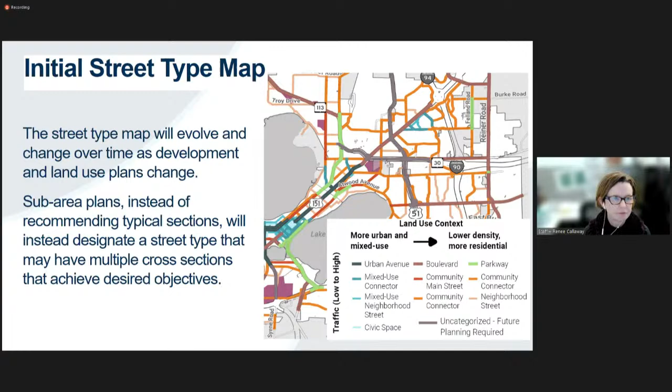So the next part is these overlays. It's kind of a weird word, but they're priorities that overlay onto that street map. Here are all 6 of them. They influence the design priorities of that street.

First is equity, and this is a bit more of a process and tracking priority. We're starting out saying all of the neighborhood resource teams are equity priority areas, and then we're going to work with civil rights and our data team, who've already been looking at those, to see where the logical expansions might be, because we know there are some. These are areas where we're going to take a few extra steps—we're going to document things more to ensure equitable outcomes across the city.

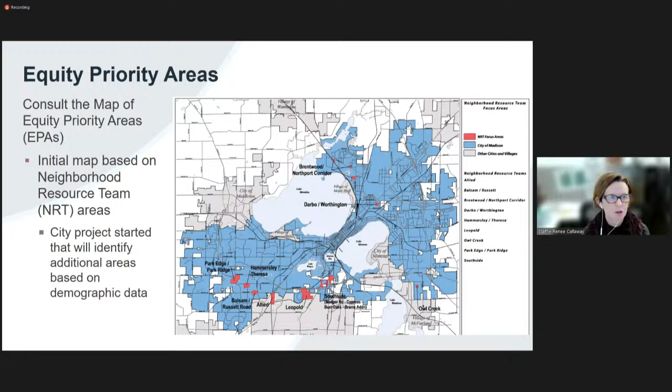You'll see here, we're always going to be looking if this is within or near an equity priority area. As we build out some other areas, we may have some things that are not neighborhood resource teams, but these are going to have some extra engagement steps, more collaboration across departments, more reviewing what other departments have heard, and some things on this checklist that I'll talk about later that we'll fill out to track this.

A transit station. So these are going to be those locations where this isn't going to be the trade-off. We're going to look at other things when trade-offs need to be made.

We also have something that I think is really going to be super important, and we've been needing this, which is our all ages and ability bike network. These are the places that are most critical for having that complete network, where someone doesn't have to be like the super cyclist. They could be anyone getting on a bike, haven't really ridden before, who are going to feel like they can ride across the city. It's connected. They can get to those critical destinations.

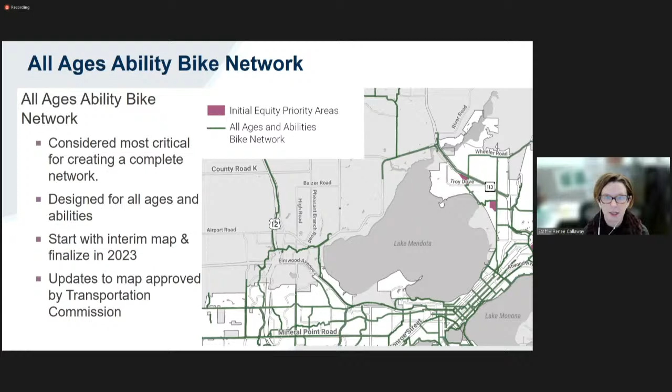For example, like on a bike boulevard, I mentioned here Mifflin Street. Mifflin Street has some parts that are at 2,000 or less, but it does have some sections that are 2,400. So this kind of gives us up to that 3,000 mark, that little flexibility, which I feel is in line with what we've been doing. It feels like it's in line. I was looking at some things that Cambridge has in some of their guidance, and they have kind of that similar sort of buffer at the edge.

So we feel like, since this is going to be kind of that line in the sand, that a little flexibility at the edges, a bit different than NACTO, feels like a good fit for the all ages and ability network. In talking to some other people, it felt like it was in line with the CROW manual, which is the Dutch manual, which has a little bit of flexibility. That's something, though, that Harold did bring up as a concern, because we have been talking about the NACTO guide a lot and showing that, even though I feel like we do kind of blur the edges a little bit.

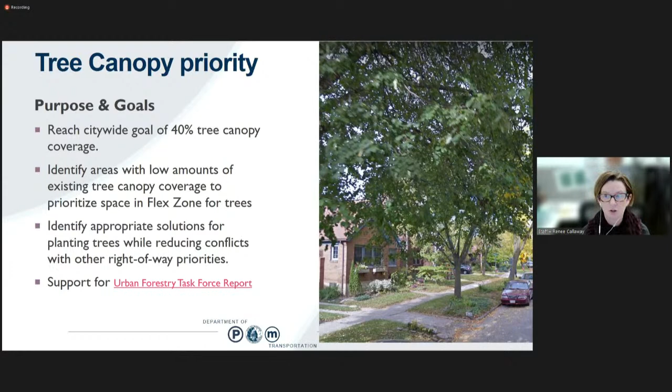And this really supports some of the things that were in the Urban Forestry Task Force report, which has many things still to come, but this helps with some areas of that and ensures we're really considering trees throughout our project. I should also say it doesn't mean there won't be trees in non-priority areas. We would still continue to follow all of our current processes for improving tree health in projects.

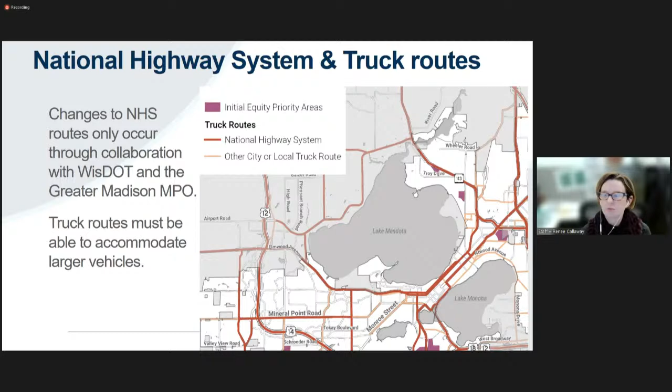And then our last one is just reality. It's kind of our lowest priority of all the overlays, but it is real. We have streets that are a national highway system route. They require us to collaborate with the DOT and the MPO on making changes. We also have truck routes where we're telling trucks this is where they should be traveling, and so we need to account for that when we're making our designs, because they pose different design challenges.

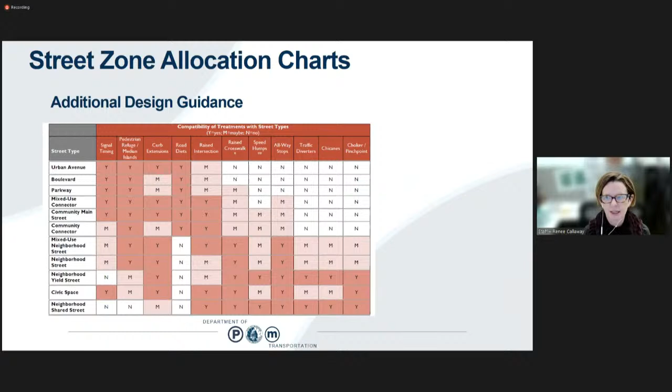And then at one of the TPPB meetings—actually this came up at the Board of Public Works—they said that speed management is such an important component of these projects, because we really are trying to design streets to the speed limit. So we have this chart that also provides a little additional guidance for people to think about what kinds of speed management techniques might work with the 11 street types.

And then, as I said, you would go back to those design priorities if you're doing a reconstruction and not everything adds up perfectly, ultimately getting to a design, or maybe a couple designs, depending on the street.

Then a little bit about implementation and the resolution that is attached to this. The Transportation Commission is listed as having quite a few responsibilities, not surprisingly. One of them is that projects that vary from this guide would need to have approval by the TC if they were to go forward outside of those parameters.

Also, you would have the ability to modify the Complete Green Streets policy guide on an annual basis as we come upon things that aren't working. Some of the green items and tree items are also under the Board of Public Works, but generally this is something that sits with the Transportation Commission. You would approve updates to the Transit Priority Network when there are changes to the system, and to the All Ages and Abilities Network as we build it out next year and into the future.

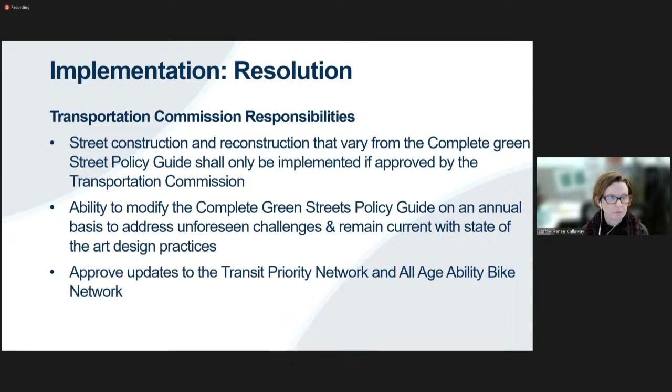Sub-area plans, as I mentioned, would have street types from this guide, and if they varied from the guide, those would go to the Transportation Planning and Policy Board. And then there would be some revisions. Section 33 is the committee responsibility, so that will need to be updated when this is approved.

And then section 16 is the subdivision ordinance. What we would want to ensure is that those are in line with each other going forward, because that has some very specific numbers in it. So we would want to bring them into alignment with this guide to make the process of development easier and more straightforward, and fit with what we want to see.

And then I mentioned that checklist earlier. This is something that we will be working to finalize and start implementing after this is approved. A lot of projects are already in the works, you've been seeing them already, so this year it's not going to be a full implementation, but we'll get started on this.

With next year's projects, we would have a full implementation. The idea is this is kind of a full record of what happens with the project. There will be some equity pieces that we'll be recording, and it will help us ensure that we're proceeding in an equitable fashion. It will help with finding the things we may want to change. This will be a way of tracking all of that and helping us continuously keep this guide updated. I think most of you know how to get a hold of me.

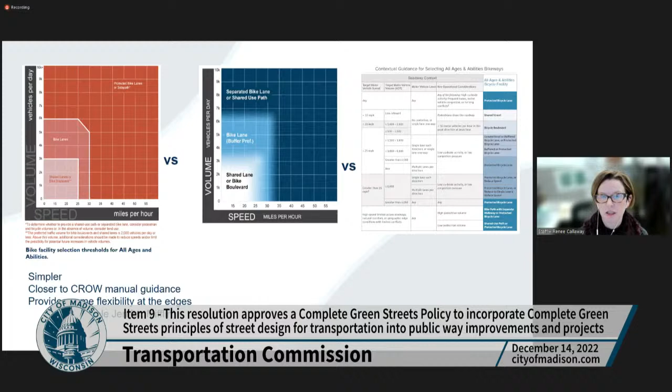Right. And I should say this guide does do something, maybe not the thing that jumps out at people, is it does adopt those NACTO guides as design guides that the city would also use in our projects. So although right now this chart on the left would be the line in the sand for all ages and abilities, it's also saying those NACTO guides are official guidebooks that the city would use in our process, which is something we have not done before, is adopt those as guides.

Okay, well that's helpful. And how are we dealing, moving on from bicycle facilities, but how are we dealing with things like curbside activity and what seems to be an increasing number of Uber drivers pulling into the curb and pulling out, and making the decision as to where we allocate space for both ride share and delivery vehicles that are not like trucks delivering to businesses.

Yeah, so it's on our work plan to develop a curb management policy. San Francisco has an amazing one. They have a really good one.

But I will say, we have a lot of irons in the fire. We have 3 times more irons in the fire than I think we've ever had. So we have to kind of do these things sequentially. So it is on our work plan for 23, but Amtrak is also, and that's a high priority. And so I'm going to say that probably